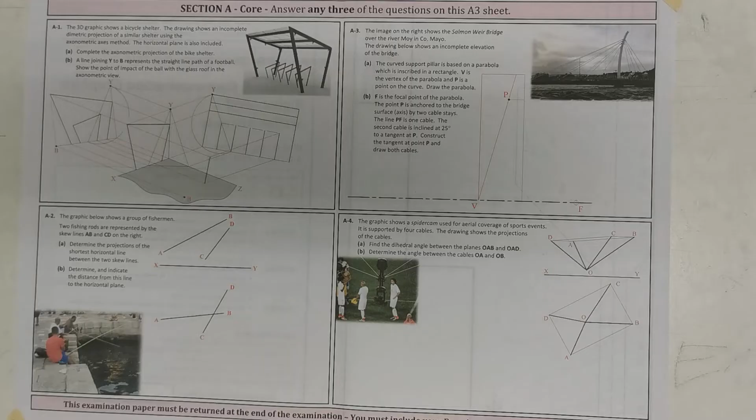A1 is an axonometric question, and just having a quick look at it there, just to be careful about what you're given. You were given...

This bike stand here, so I'm going to just number these 1, 2, 3, 4 and 5. So...

When they project in, I'm going to just project this forward another bit now, because...

The one that's given here is the one on the ground at the back. Now again, I'm going to just throw a few colours in this to help people understand it, but they're after giving the back leg of the fifth one.

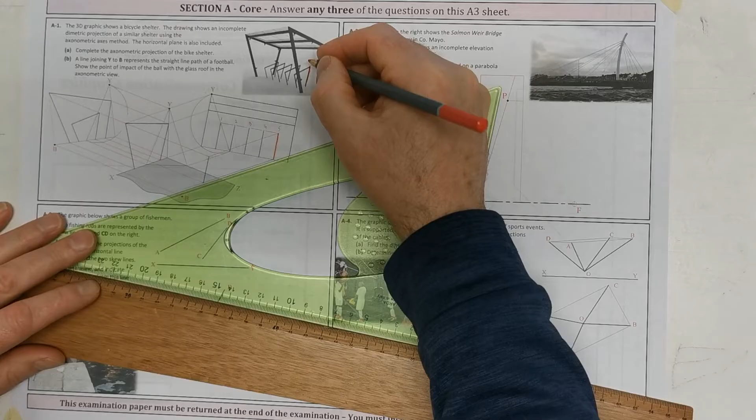So I'm projecting forward here so I can find these points on the ground. So I'm going to draw this. I'm going to draw those supports inside here first, and then I'll do the roof and the frame around it afterwards.

So we now have this point here on the ground for the fifth one. So what I'm going to do there is I'm going to just project forward and find the points on the ground for all of these.

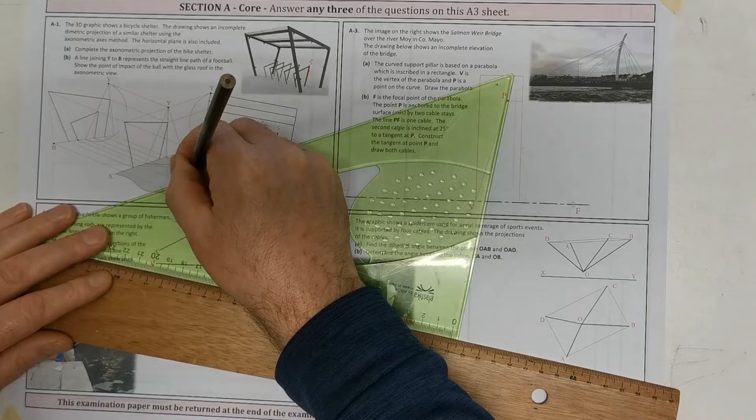So those 2 points are for the fourth, third...

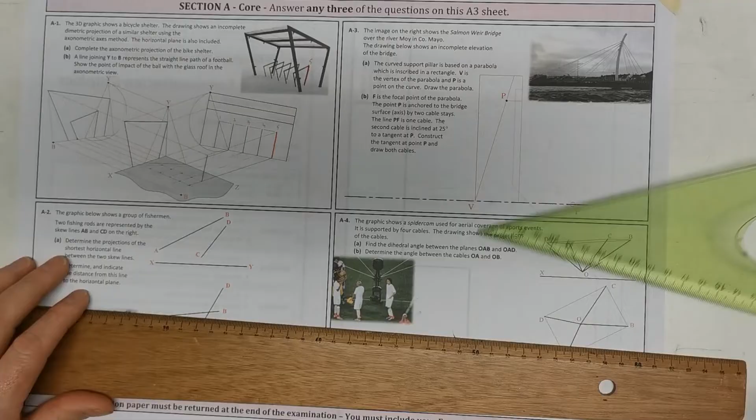Okay, so they're all the points that are on the ground. Now what I'm going to go now and bring next is I'm going to just project there. So this is the high leg at the back.

Okay, so the point up here. So I'm going to find them next. So they've already, well, it's just coinciding here, but we've got the line to work with on that. So I'm going to find these next.

So there is 5 found. So 4 is here. Now...

I'm going to leave out some of these lines here now just to reduce the clutter. Okay, just so you can see where that one came from. So, and I'm going to draw these in.

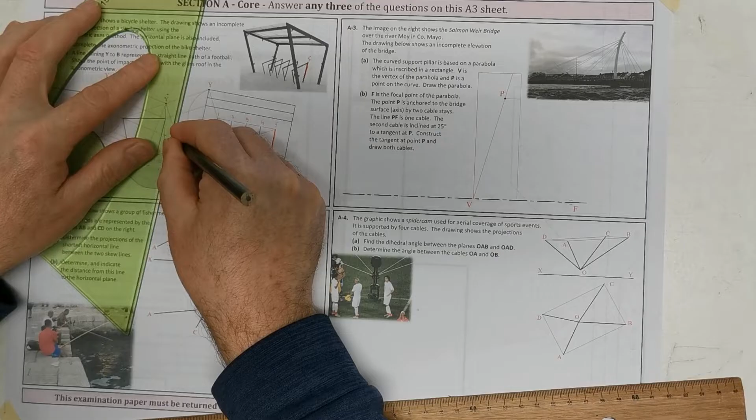Okay, so we have found now the 5 back legs there. So my next issue here now...

I'm going to project down the line that contains all of these front legs. So they're all at this height.

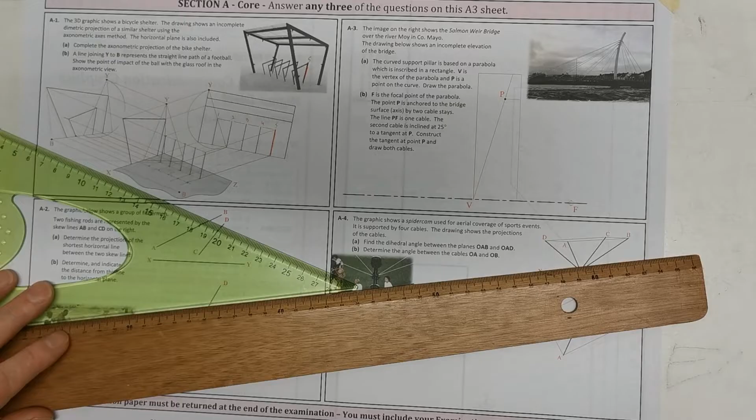Now, the problem here now is these sloping down bars here. The height, we knew the height of that off the ground because we were given that.

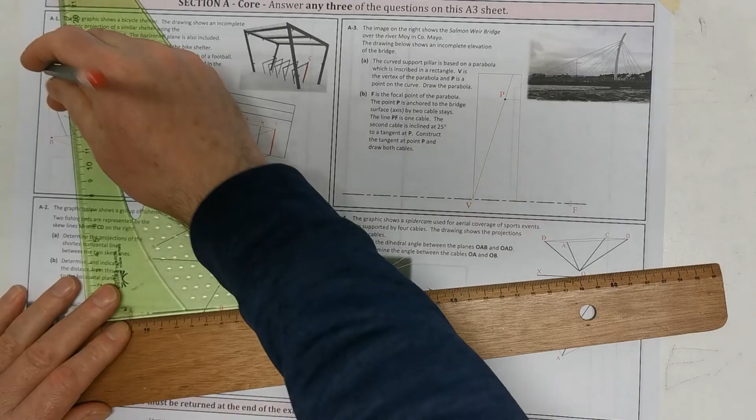But what we need to do there now, I think the easiest way to do this is I'm going to take a height from this side view. I'll just put this in red so you can see it. I'm going to just call that H. We need that height.

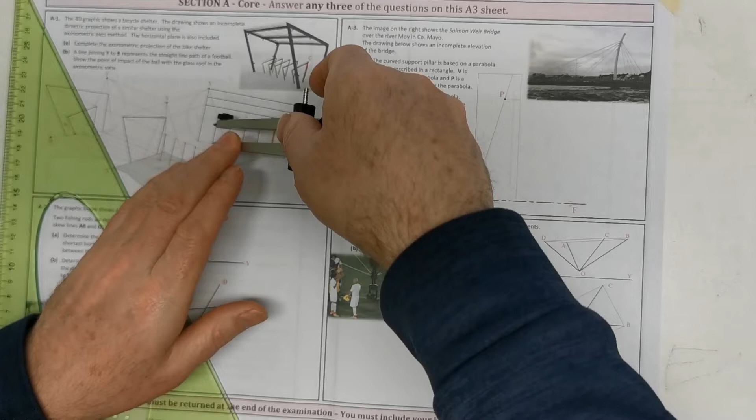So I'm going to take that height. Now since this is a side view, a height in a side view is the same height in a front view, which is over here. I'm going to step that up there...

And take them across parallel to the ground. So I'll just mark these bigger than they need be so you can see where they're coming from.

So that now is the height of the front points in all of these. So now I can project these down.

So that front point must be on this line here. Okay. So that's 1, or that's number 5 really. Number 4.

Number 3. Number 2. Number 1.

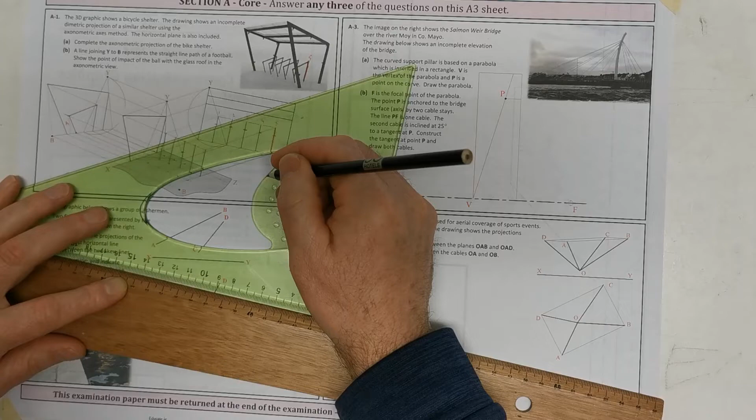Okay, so there we go. 5, 4, 3, 2, and 1.

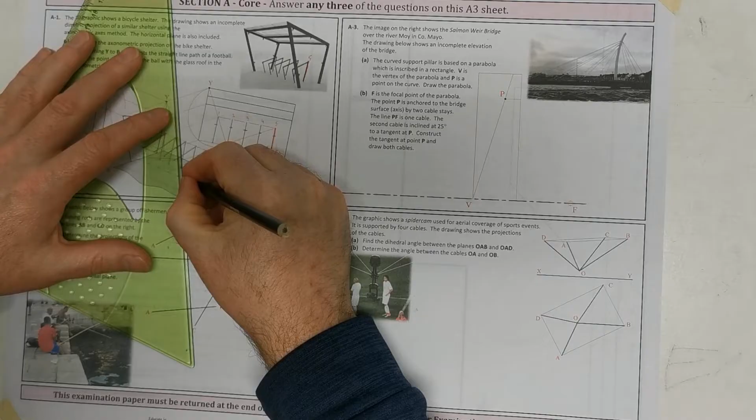And then they return down to the ground, like that.

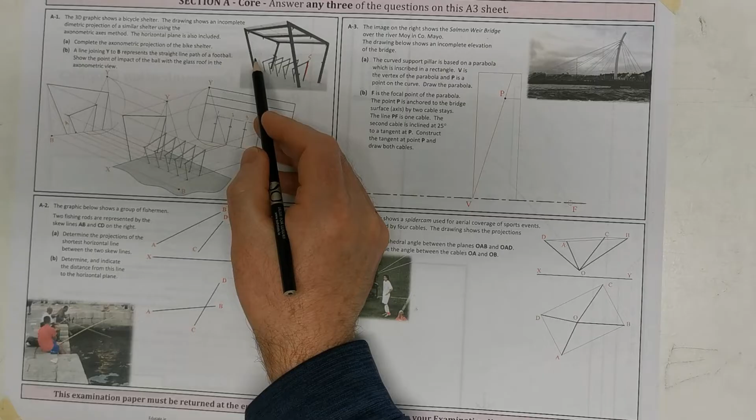Okay, so that is our 5 bike supports. So now we need to do the shed or shelter there. So we know they've given us the side of that there, which was a big help.

So I'm going to find the highest point here out of the front. Now I just need to project, because I'm projecting it down from the side view there, and then I'm going to project it down...

From there. Okay, and that point is here. Now it's coincidental that this projection line here brings down the top height of the front of the shelter, but...

It also coincides with the back of the supports as well. That doesn't make a difference, it's just a coincidence. Okay, so that there is the point that I'm after finding, and...

I'm going to use parallel lines here now as well. So the back lower down point, I'll draw this a little bit heavier than I normally would, just so you can see it.

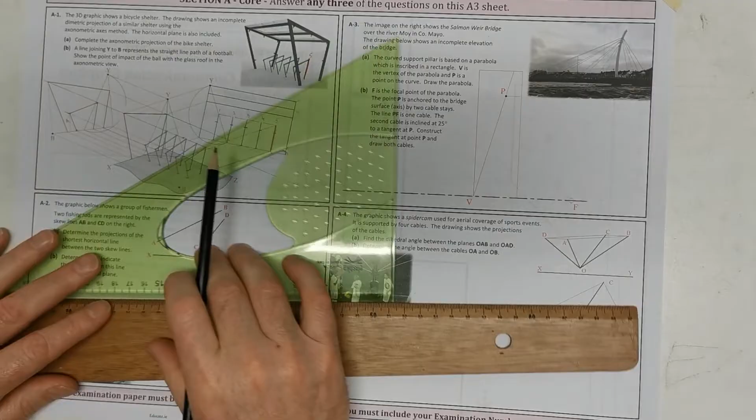So the back low point, I'm going to put L for low, H for high, and that middle line there represents the middle steel support in the shelter. So the low one comes down to here.

Okay, the low one comes down to here and there. We already said the high one is coming down from here and there. So that gives us

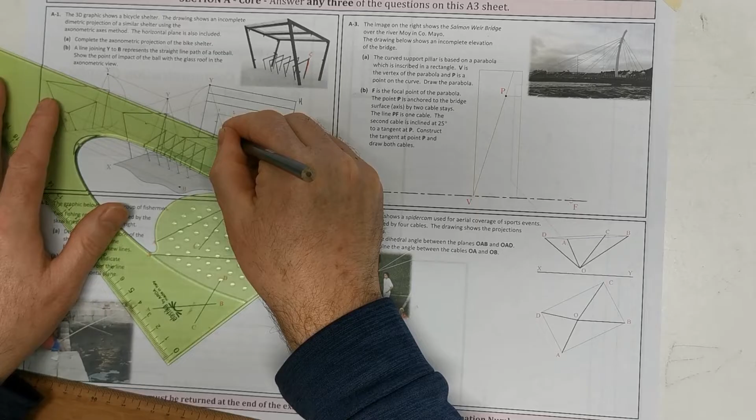this line in the shelter. And I can also heavy in then properly that, this, and now the next thing I want now is, and just be careful with this here now, they did not give us the projections of the leg supports here.

These two points on the ground are coming in here. So those points on the ground, the front one, when I bring it down from here, so here's my front support, here is my back support in the side view, so I mark that.

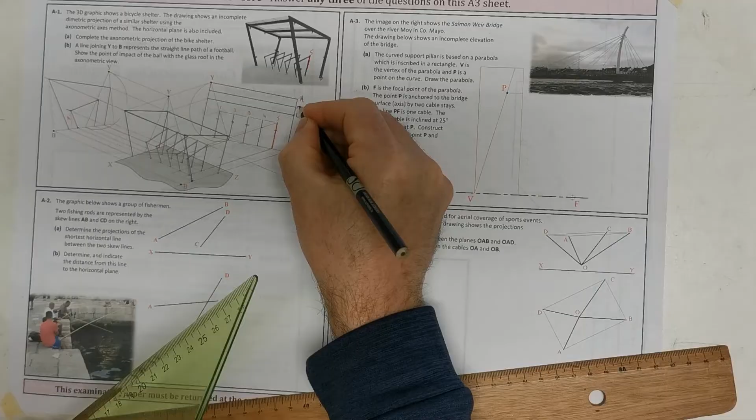So the back one goes up to there, the front one goes up to here, and all I'm missing now is the middle support there, which is where that, I'll just put an M on this line here. I'm missing that middle support now, so I will just project down that line, and that locates it, and we know it's parallel.

And that, I think, is that. So it says a line joining Y to B represents the straight line path of a football. Okay, so a line joining Y to B represents the straight path of a football.

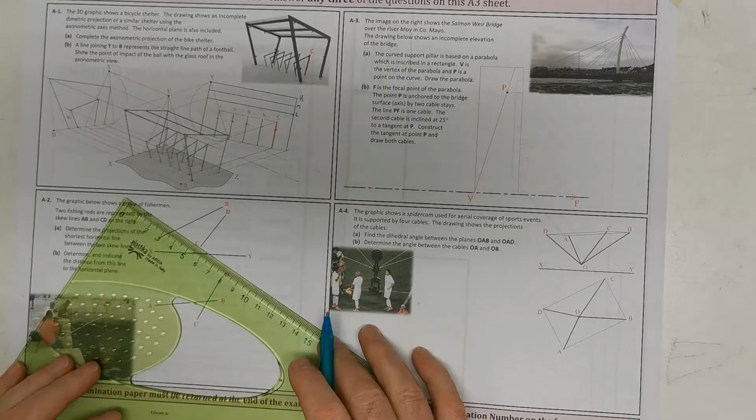So show the point of impact of the ball with the glass roof in the axonometric view. Okay, so basically, where would that ball pass through or impact with the glass roof? Look, what I'm going to do there is I'm going to just do this in green so you can see.

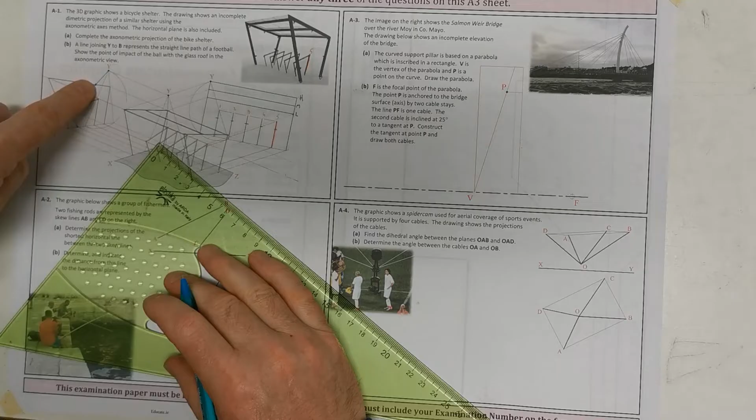So look, if I kicked a ball from B going in the direction of Y, it is going to impact the roof here. That is where it is going to impact it, because I'm going to just do this off the end view. So we can draw in the path of the ball down here. So from Y to B is the path of the ball.

So I'll just put that in green so you can see it. That is the path of the ball, and I'll just put an arrow to show the direction the ball is traveling in. And where does it impact the roof? Well, we know that it impacts it here in the side view.

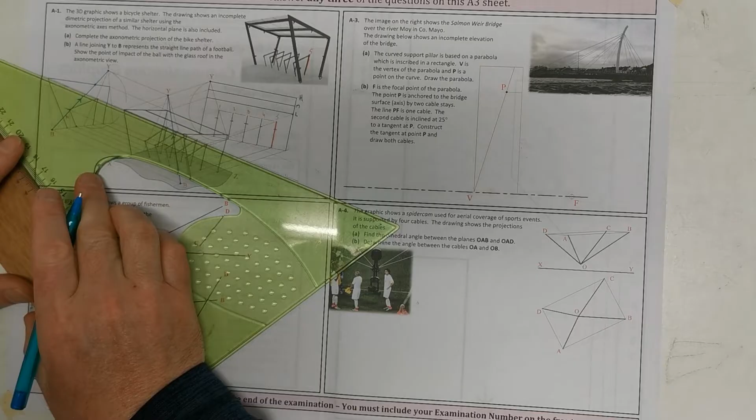So if I project that down to here, that there point P is the point of impact. Just put a little arrow there to show that that's coming down from here. So that's the point of impact in the side view, but we want to show it on the axonometric, and there it is.

Now, second question. So, fishermen skew lines. So two fishing rods, AB and CD. Determine the projections of the shortest horizontal line. Now I am going to highlight here just one thing. Horizontal line, okay? Because the shortest horizontal distance is different to the shortest distance.

The shortest horizontal distance needs to be horizontal in the elevation. So it's not going to be at an angle like that. It is going to be horizontal. So how you go about this is the same whether it's shortest distance or horizontal distance. The first steps are the same.

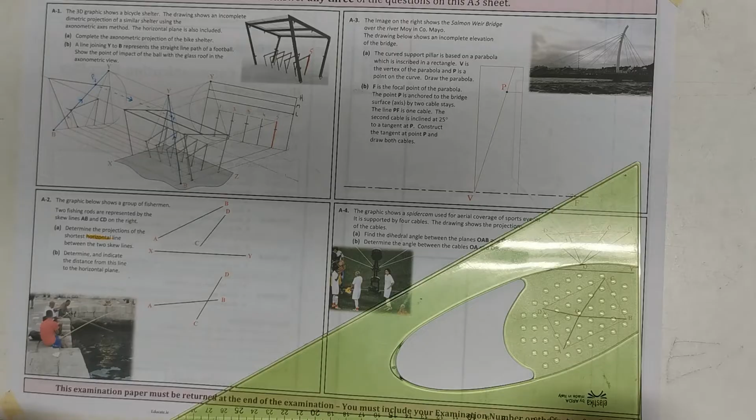We want to create a plane where I'm going to go parallel to AB. It doesn't matter which line you choose to go parallel to, so I'm going to just pick AB. I'm going to go parallel to AB and horizontal from D, giving me here a point that I will call X.

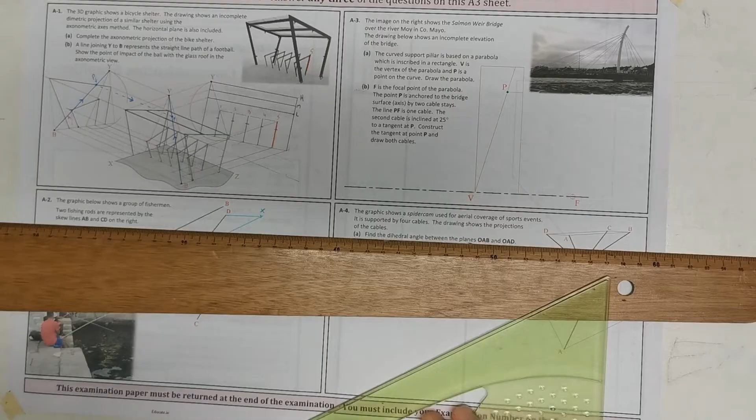Okay, and I'm going to mark now that that and this are parallel. So that's parallel to AB. So I'm going to bring down point X to the plane. And I want to do the same parallel again.

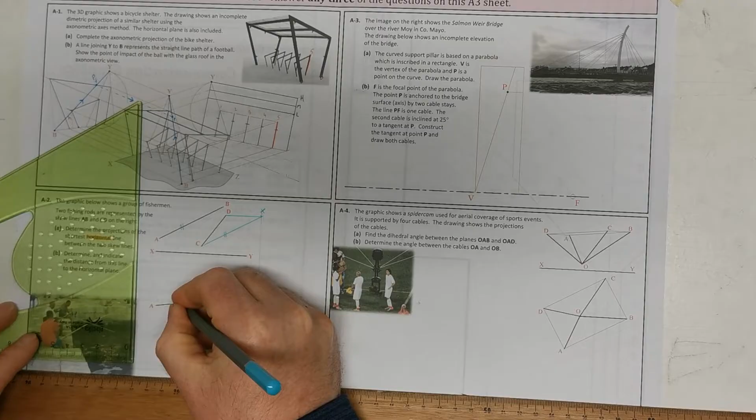So parallel to AB. Parallel to AB. So I want to go parallel to AB from C. And this is X now found in the plane.

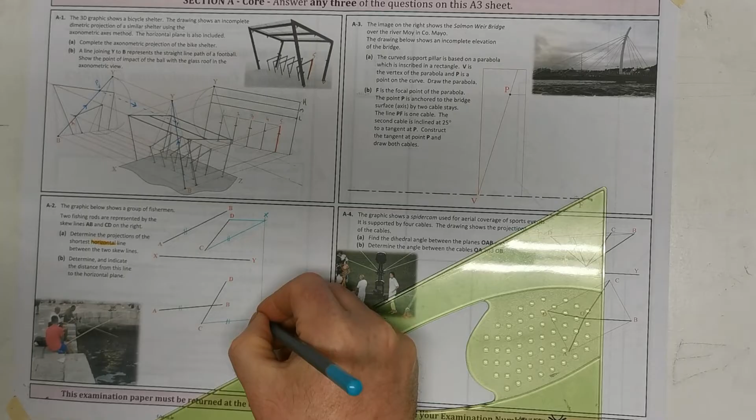Because X has to be down here, and we want to do the same parallel in both. So I will just join there now, X to D. No, X to D is the angle that we want to look at.

DX, horizontal line. Now, if I look at that angle, DX, now I'm going to keep the XY line. I'm going to draw down on top of my construction work here now, because all I wanted to find there was the angle to look at. Okay, so now that I have my angle to look at,

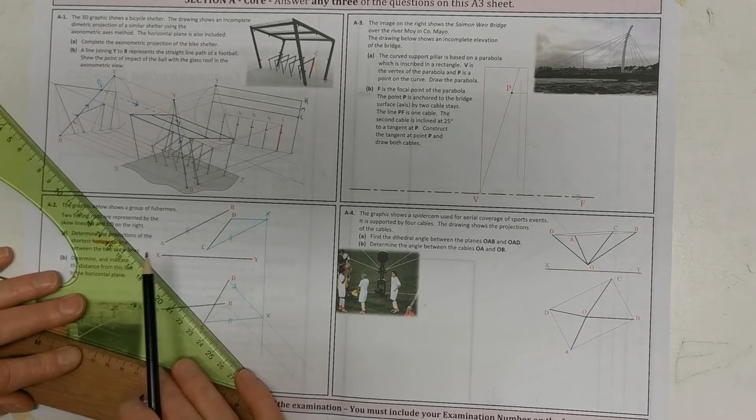and I'm going to project these forward. So D and B, A and C. Okay, and really what I wanted there was that angle. And the XY line I'm going to put at 90 degrees obviously to them, but I'm going to keep it back here because now I've found the angle to look at. So here's my XY line.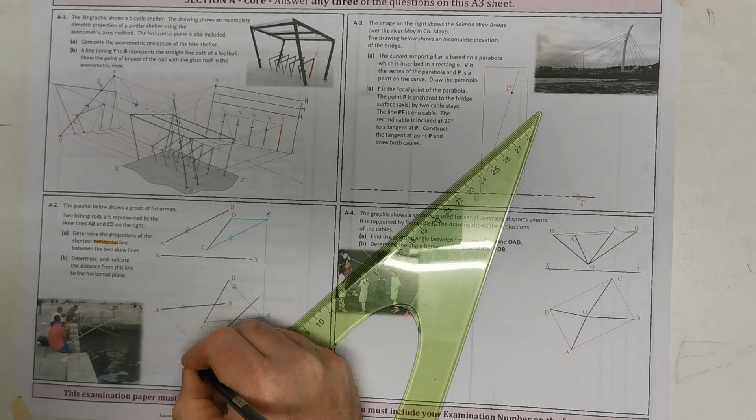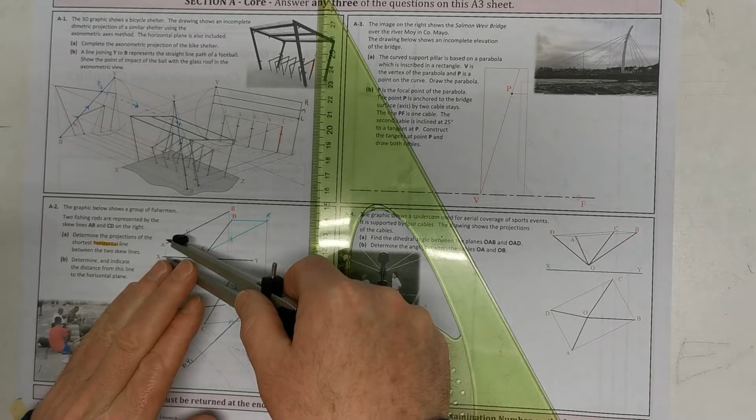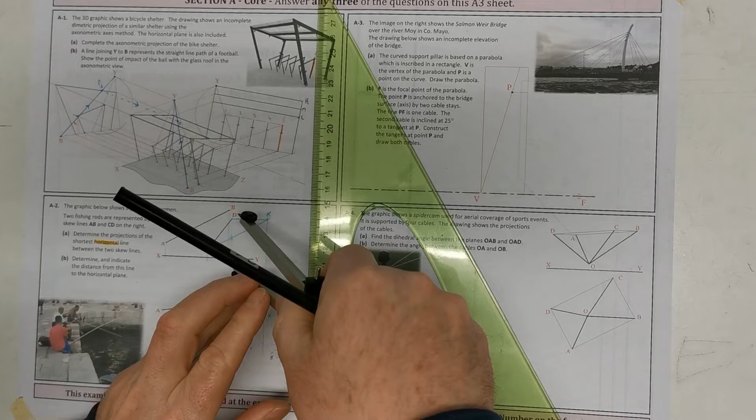Okay, now I want to draw that auxiliary view there, and these lines should appear parallel, so I'm going to project these down to take some heights. The rule with auxiliary views always remains the same. I'm projecting from the plan, so from the last XY line back. So my height for A, and C, B, and finally D. Now this view, the lines should be parallel. If they're not parallel, you've done something wrong, so stop and be careful, don't try to work wrong.

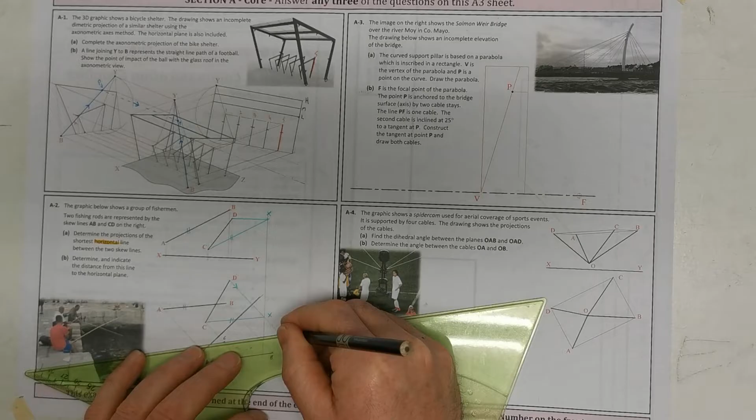So A joins to B, C joins to D, so you can see they are parallel. Now if I wanted the shortest distance, I would take another auxiliary perpendicular to them, but this is the point I was making earlier. We want the shortest horizontal line, so we need to look parallel to the ground. So here is the angle of the ground.

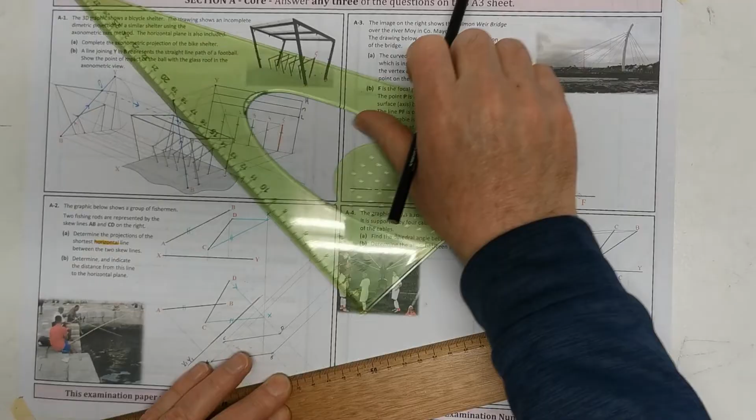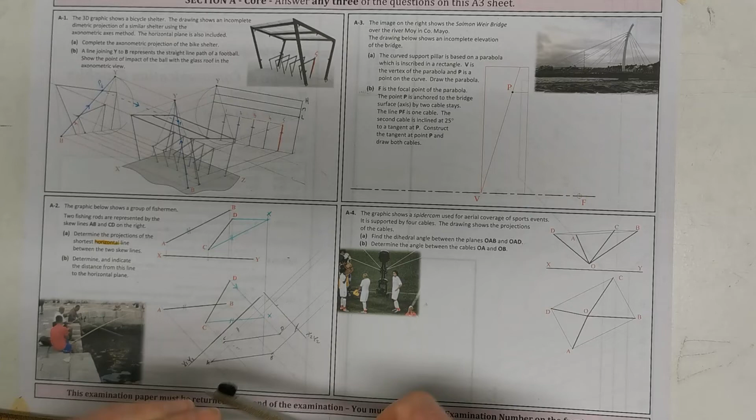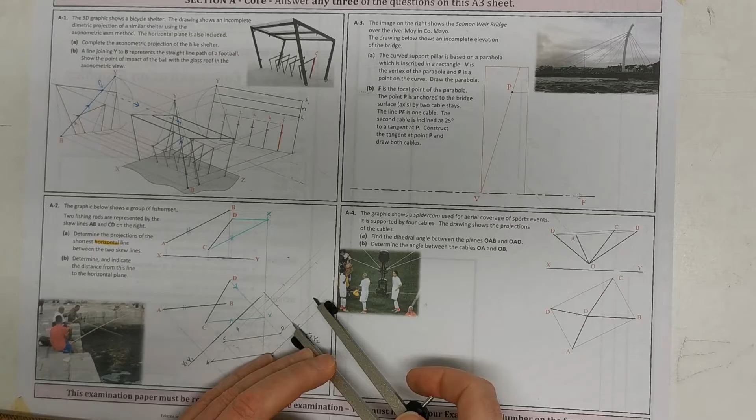So we want to look parallel to the ground to see the shortest horizontal distance. So C, A, D and B, XY line. The XY line goes here, and again remember the rule, I am projecting from here, so from the last XY line back is my distances. C should be the closest one. There's A, which is the furthest away. Just be careful you don't mark a distance on the wrong line. D. Okay, so I'll just index these B, C, A,

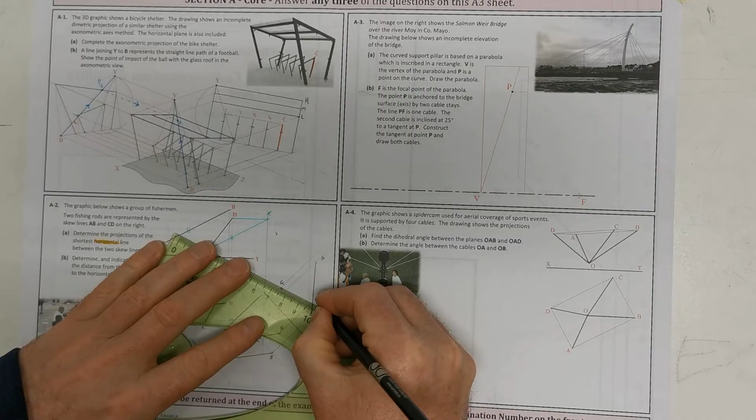and D. So when I join these now, they should be crossing. So we've got AB, CD, okay. Now the point that I'm looking for is this point here, where they appear to cross. I know they appear to cross in the same way as these pencils appear to cross there, but they don't in reality.

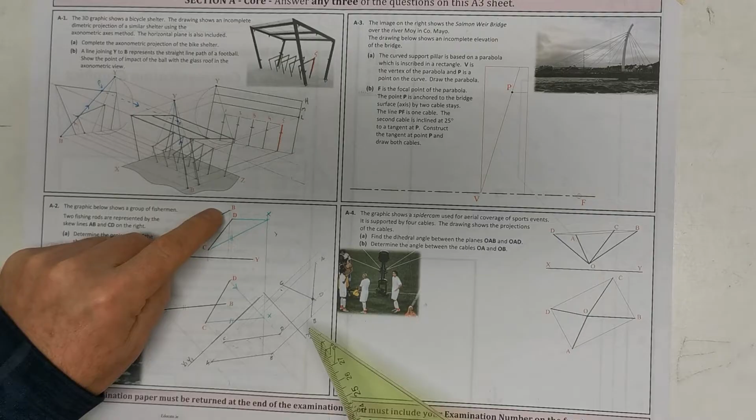So this is the shortest distance, but we need to bring that information back to the plan and elevation. I'll just leave it in green here. Switch to set squares for this. So there's our angle to project back, and that is our shortest horizontal distance here.

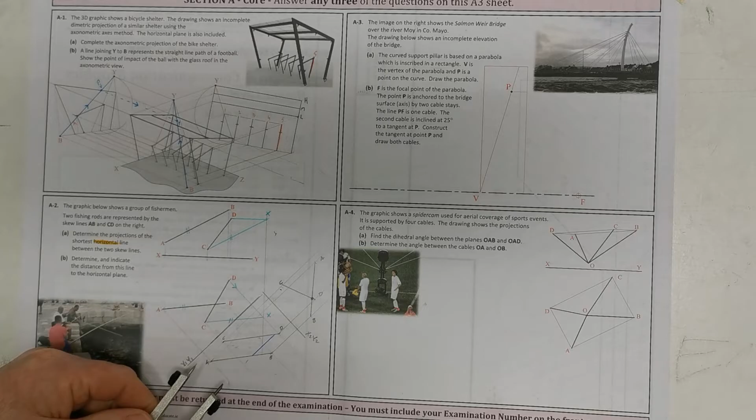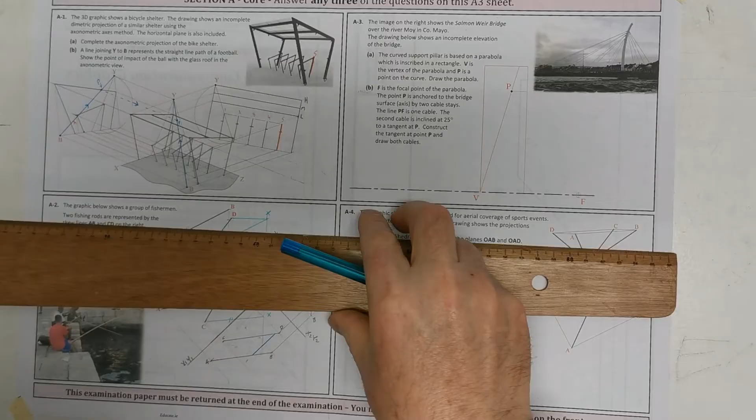Now you could find that point on AB and find that point on CD and project back and project up. I would have a slight preference, because when we were setting up this view, we took - I'll just demonstrate with A - we took our distances from A from here, so they're all heights that came from elevation. So what I can do now is I can take this height off the ground here and step that height up here,

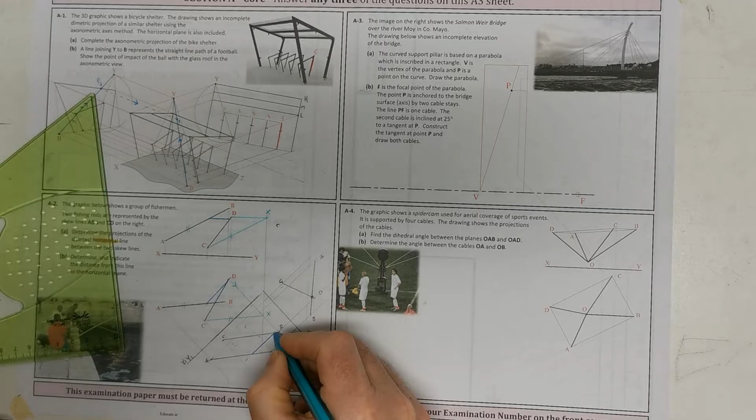and that is a more accurate way of bringing my shortest horizontal distance back. And to bring it to plan, then it's here on AB. I won't draw this line down now. It's here on AB, it's here on CD. So the plan of the shortest horizontal distance is here. Now that would have given me the same answer if I brought this point back onto AB and up and back onto CD and up. But if you're any way out, and it's easy being a mil out, it can sometimes give you a sloping line up here when it's supposed to be horizontal.

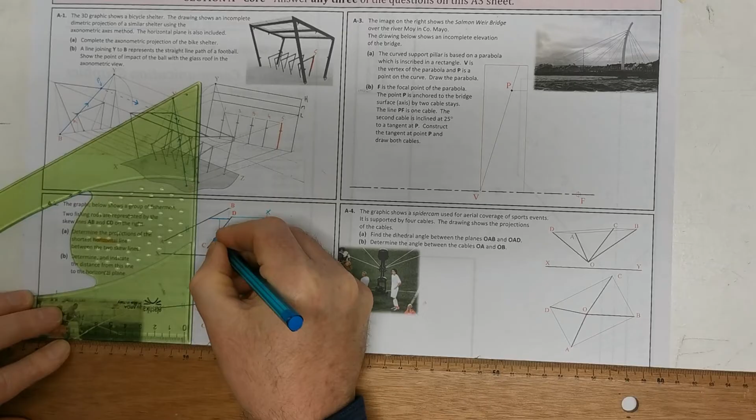Okay, now the second thing there says, determine the projection of the shortest horizontal distance is done, and determine and indicate the distance from this line to the horizontal plane. So determine the distance from the horizontal plane is just to indicate it from the horizontal plane, it's kind of a test of terminology really. So it's like there to there is the height. Okay.

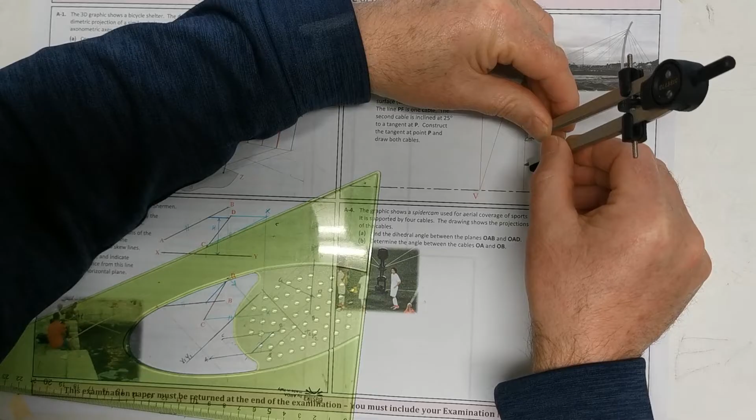A3. Now again, this is a curved support pillar based on a parabola. So we've got the vertex and a point on the curve. Our curve is coming this way, and there's the focus of the parabola. Now whenever you're given a point, let's see if I take this distance here. If it's a parabola and the construction is set up for you, you could work with your own distances, but generally you can presume that it's a quarter, a third, or a fifth. You can see there - that was exactly a fifth, and it's the same in this direction here.

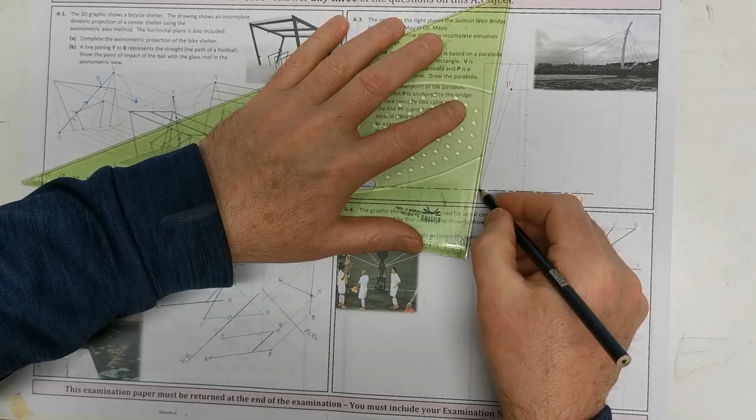Just need to be accurate there, because if you're 1 mil out and you step it 5 times, you can be 5 mil out. So here's my distance here for this one. So this will work out being 5 as well, because this is back to our junior cert parabola construction. Now I'll put that on another video anyway at some stage, but so we're just constructing a parabola in a rectangle. So those go to the vertex, and they'd already found the first one, so it's second to the second.

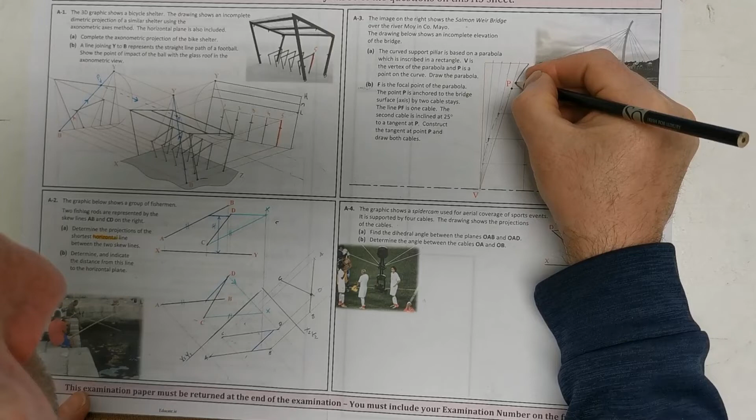So those are all our points starting here, and there's our parabola. So the curved support pillar is based on a parabola in a rectangle. Draw the parabola. Okay, so this now being a parabola, we know that...

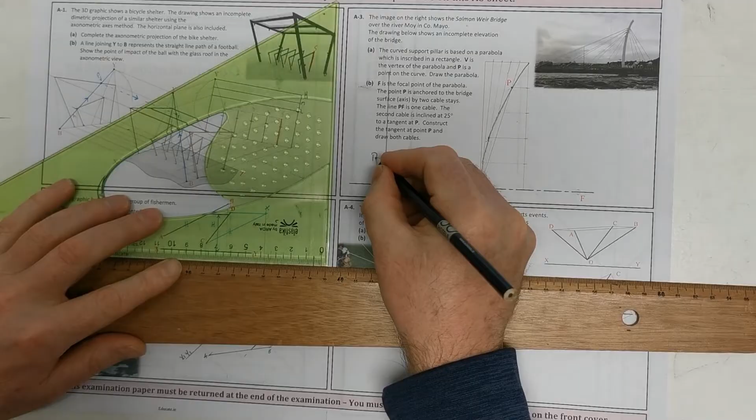Point to the focus would be also - I'll tie this in even though it didn't ask for it - that distance from the point to the focus would be the same to the directrix. So if I want to, I could just find the directrix here for this. It would be here, that distance, that would be the directrix there, DD. So we've got our axis.

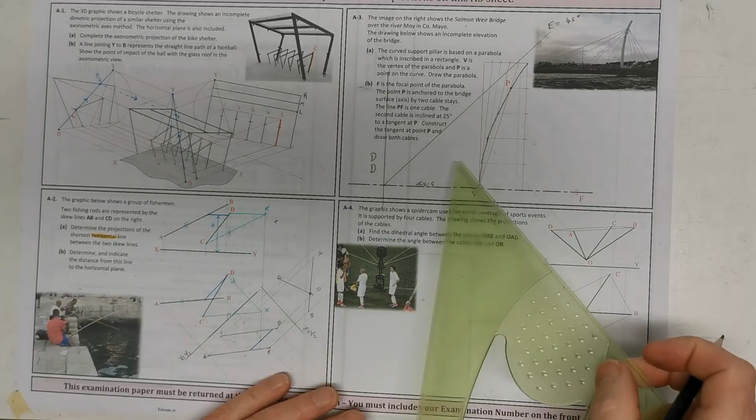Just to link it more to the other method, the eccentricity and axis method, and since that is the directrix and it's a parabola, the line of eccentricity is equal to 45 degrees here, just to link it in with the bigger picture. And if I came straight up from the focus there, it would be tangential to it and all that. Just linking it to the bigger picture there.

But what they asked for here anyway is that F is the focal point of the parabola. Point P is anchored to the bridge, and the line PF is one cable. I'm going to put this in blue here now. So the line PF is one cable.

And the second cable is inclined at 25 degrees to a tangent at P. So construct the tangent at point P and draw both cables.

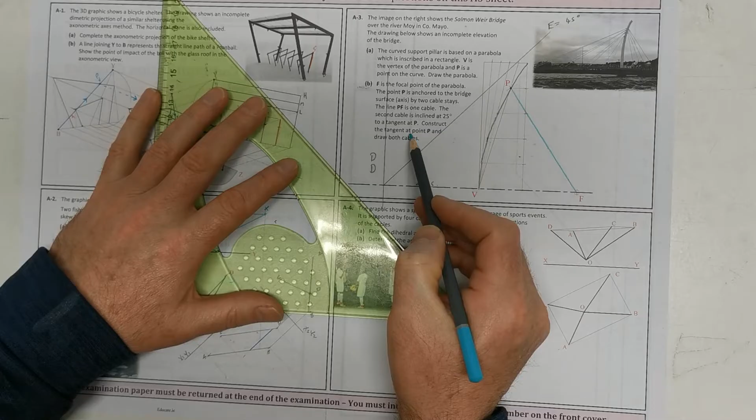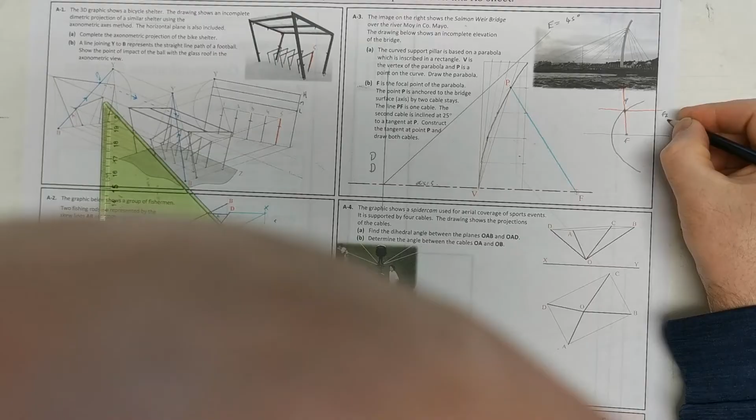Okay, so the rule with drawing a tangent to a parabola - let's say you've got a parabola here. I'll just sketch it over here for a second. There's the parabola, and here's your focus. And if we want a tangent at P, you join to PF, I'll extend that, and join to the second focus or focal point, which is at infinity, F2 - I'll just put the infinity symbol here - which is parallel to the axis.

And we want to bisect this angle here now, and that's going to give us the tangent. I need to apply that construction over here. So the second focal point would be at infinity, that's the rationale or the thinking behind it.

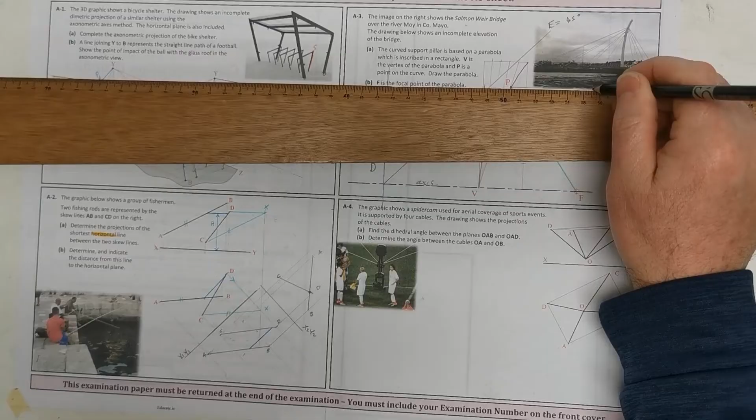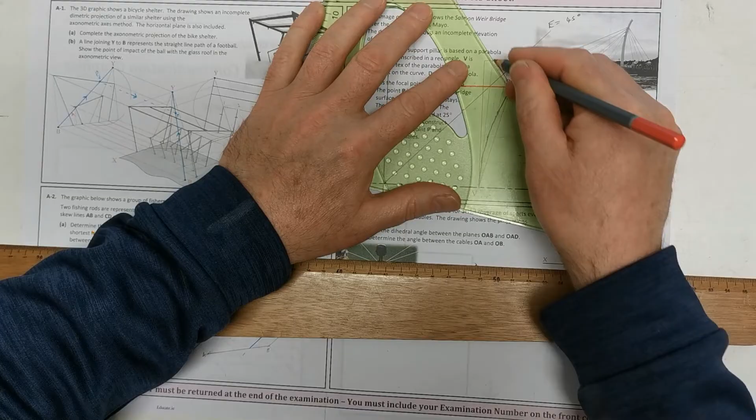I'll do this in a color there now just to make it a bit easier to see. Okay, so I'll do it in red. So there's that one, and there's our cables there. So I'll just extend this out as well here in red. So I want to bisect this angle here, or that angle there.

Do that with a compass. So again, step out a distance. Don't do this too small now, do it a bit bigger, do it big so that it's more accurate. Just make the compass a bit bigger, so two equal distances again. Swing an arc, another arc. Okay, now this is the bisector of the angle.

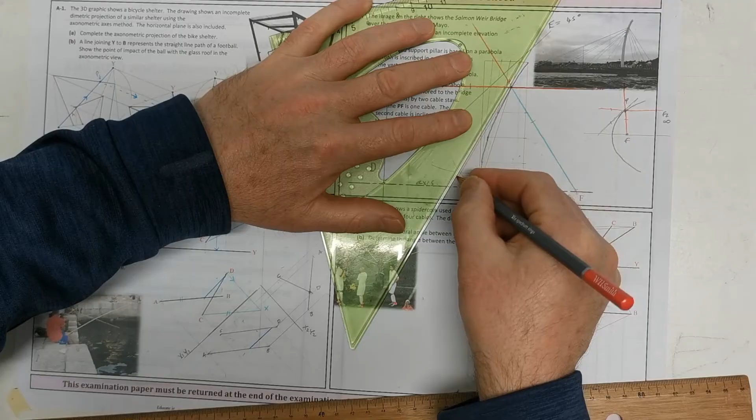So there's my tangent. I'll just put a T on that. So I have found the tangent here now, T for tangent. That is the tangent. And the cable stay is 25 degrees more than that.

So you need a protractor there then for this. So there's our protractor. Now 25 degrees angle with the tangent. So I'll just line that up with the tangent. So 25 degrees more is there. So that's the angle.

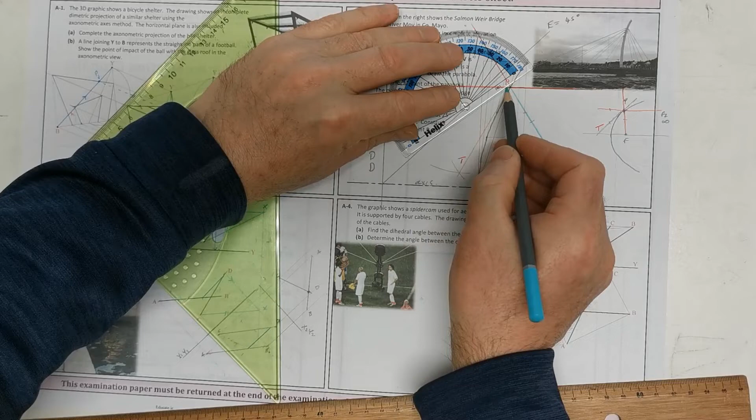For the second cable, I'll just extend that off over here to tie it down. Now I know that finding the directrix and putting the eccentricity and all that stuff in on this, but really it's better off to try and understand the big picture on conics rather than just answering the questions in isolation. You need to see the big picture. So construct the tangent to point P and draw both cables.

So that's that sorted. Finally, the graphic shows a spidercam used for aerial coverage of sports events. It is supported by 4 cables. The drawing shows the projections of the cables. Find the dihedral angle between OAB and OAD.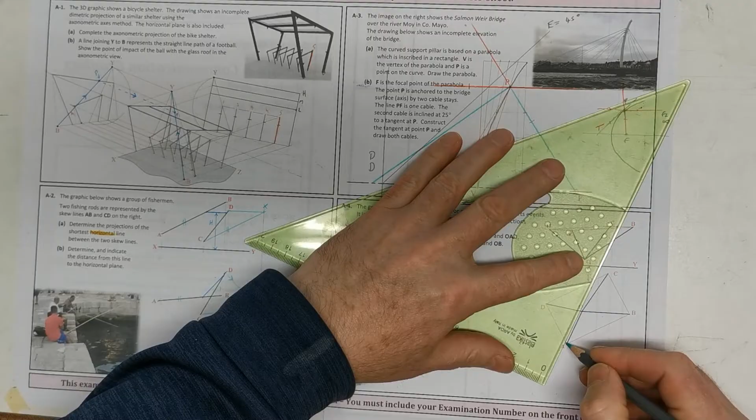So OAB and OAD. So again, OA - I'm going to put a color on this. OA is the line of intersection. It's on both triangles. So I'll just color that in good and bright there now so people can see it.

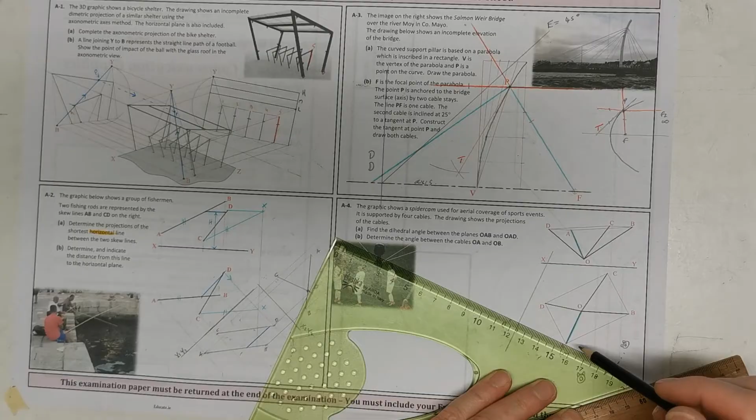So I'm going to put an XY line just over here. And I want to project these up 90 degrees, so we're going to need definitely A. We're going to need O, which is down near the ground. D. B. And C.

So again, our rule on auxiliaries applies here now. So we are projecting from the plan, from the last XY line back. That is the rule. Now ideally I would find exactly beneath this, but okay, so that's my height for O.

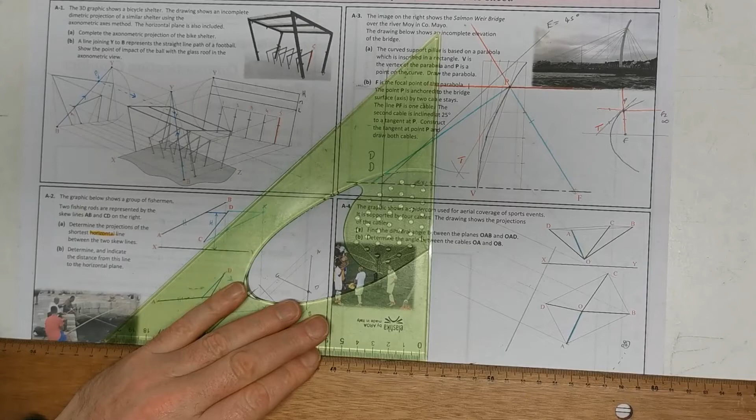Now I'm going to just mark these here, just project these down so that I can take absolutely vertical heights to be accurate.

So A, again just be careful now you don't mix these up. So A, I'll go a bit slower because I'm trying to teach using these questions as opposed to just answer the questions. So AO, that is the true length. Just put in there TL. Now that is what we were looking for, but I also want some more points as well because we can't find a, so D is this height.

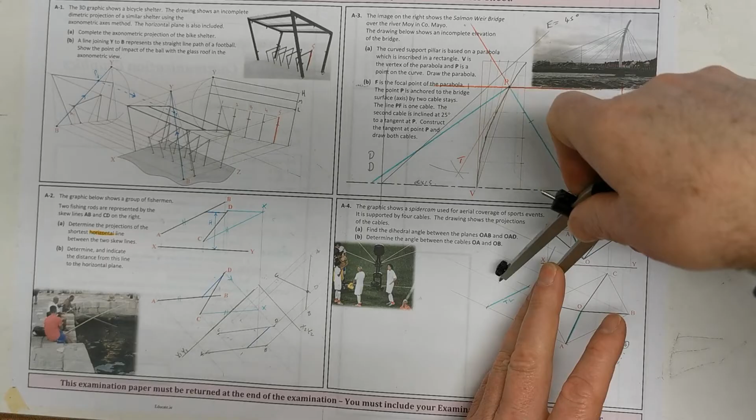We can't find a dihedral angle without a point on each of the other triangles or planes. So C is here.

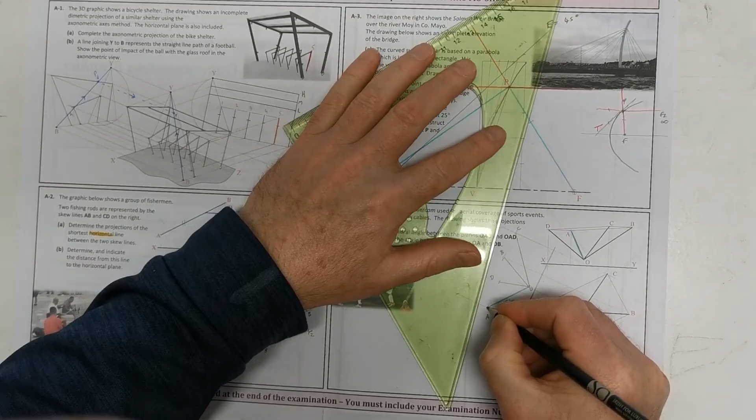Okay, so I'll just index them again. There's C, B, O, D, and A. Now, do I have to join them up? Well, I will. Okay, so it's A goes to D, D to C, C to B, and back to A.

Okay, so that now is the true length of the line of intersection, so between both of them. So I want to look along that now and get a point view of it. So I want to look along that. I'm going to put an XY line here pretty close.

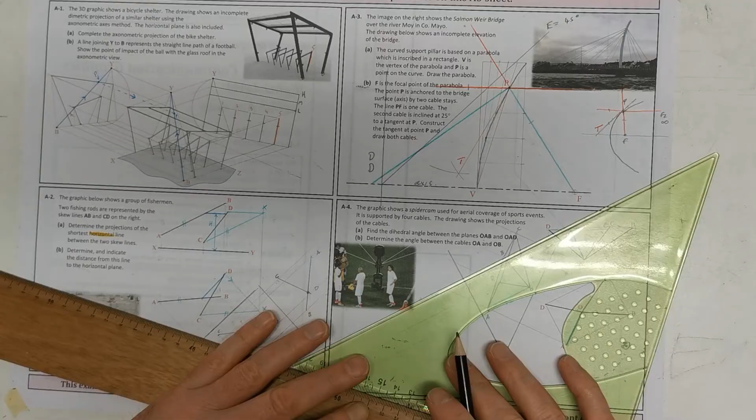So bring our points, project them out again, that angle. Okay, now the reason we're going to be getting a point view of this is because by putting the XY line parallel to AO there, when I take my distances here, now we're projecting from here, last XY line back. So when I take that distance here for A and for O, it's the same distance. So when we look along that true length, they're both the same distance and they're both on that line.

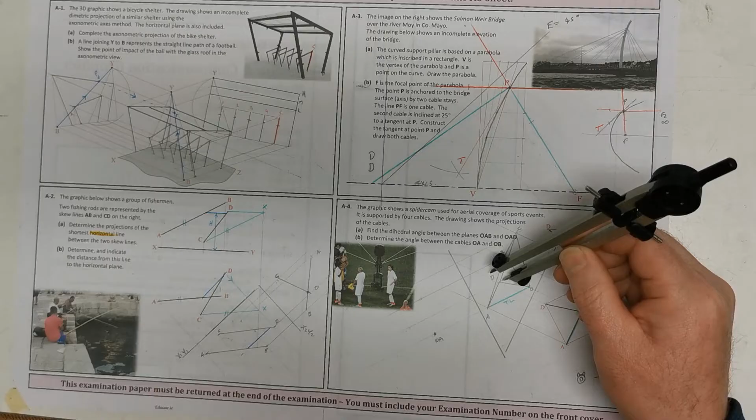So that now is a point view of O and A. So now we need some more points. So I'll bring D. Now really I only need D and B for what I'm doing here. Okay, so D is there. B is here.

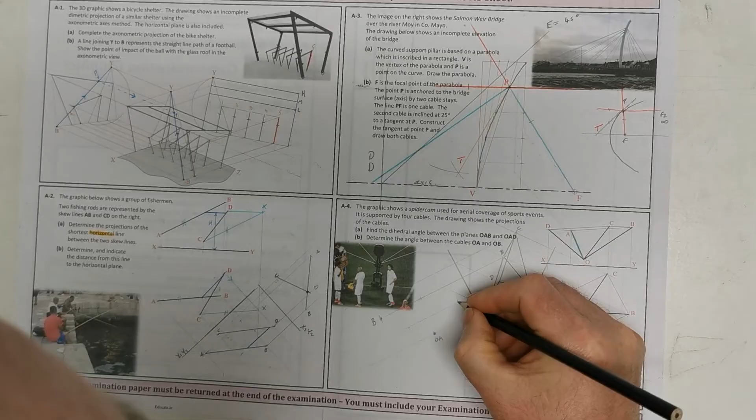So this is my dihedral angle. Okay, so that's the dihedral angle between OAB and OAD, and that's edge views then of both planes.

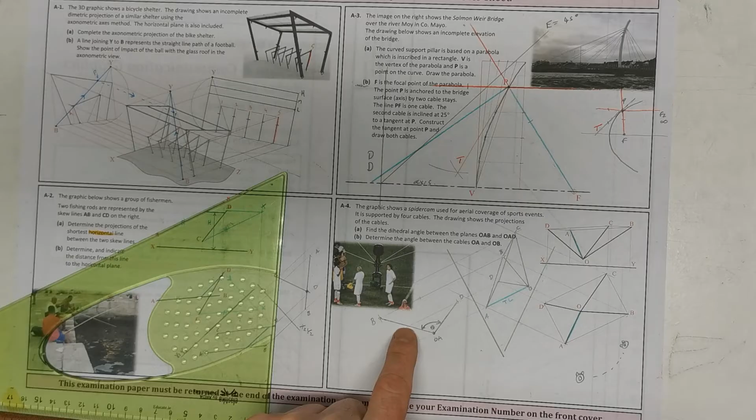And then determine the angle between the cables OA and OB. Okay, so they want the angle between the cables OA and OB. Now really what they're asking for there is the true shape of this triangle. Okay, so they want the true shape of OAB.

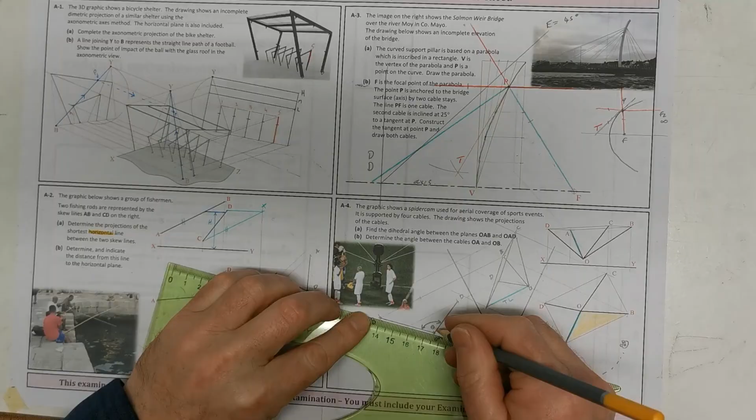Just color that in there to again help us understand it. So the angle between OA and OB, true shape of that. Now a really quick way of finding that, the true shape of OAB, because if I color that plane in there, this is it here. We have it here as an edge view.

That's an edge view. So if I was to look down here at this angle, perpendicular, so I'll just draw a person looking down there. So if I was to look down there perpendicular, I will see a true shape of that. And if you already have an edge view of it, that is the quickest way to finish this off. So just set up there my set squares to go.

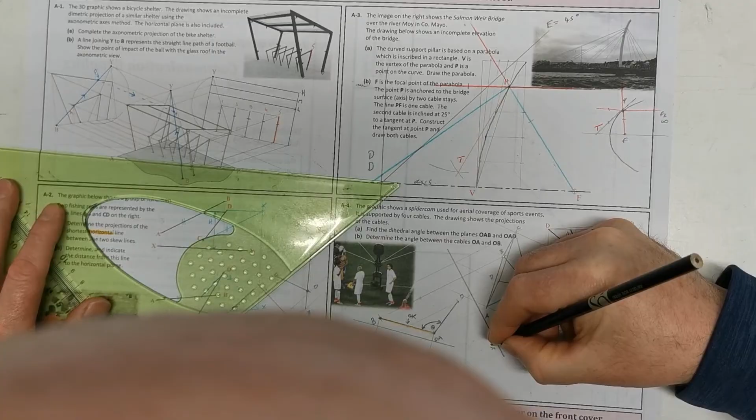Okay, so that's our angle. So I want to look down here. Going to put an XY line there really close. Okay, so that was my XY line, that was XY1, XY2, and I'm putting in XY3 here. So I'm looking down here, so I'm projecting from here, so the last XY line back.

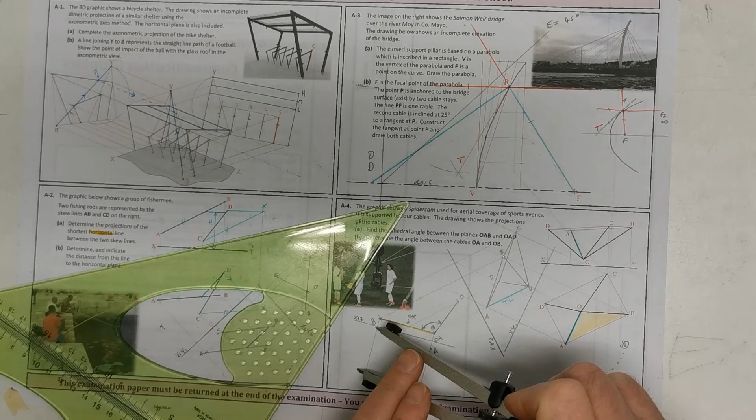Projecting from your last XY line back, so my distance for A, my distance for O. Make sure you have a good sharp point in your compass for these. So A and O, and finally my distance for B.

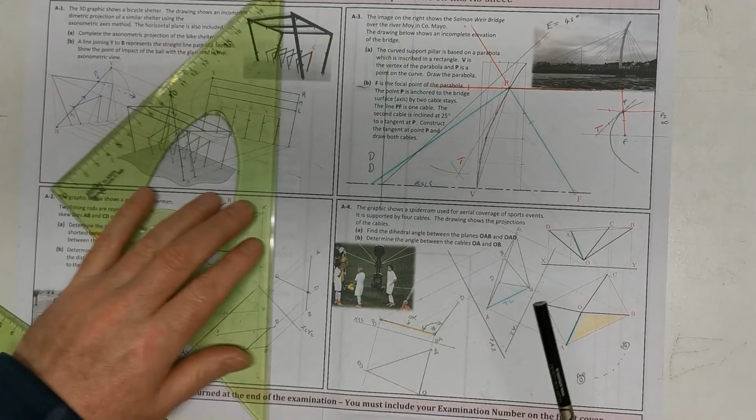So that there, AOB. And again, just to link it back to our plan here, just colour a tiny bit in. Okay, and the angle they wanted was the angle between OA and OB, so it's the angle at O that they were looking for. So I just marked it in there with a little theta.

Now there are other ways you could do it. I mean, I could have taken a horizontal line from A across here to OB, find that point at OB, and I could have taken an auxiliary and got an edge view of the plane down here and looked at 90 degrees to that. There's other ways of doing it, but if you've got an edge view in the dihedral angle, it's just quicker to take one more view and you have it. So yeah, that's 2018 sorted. So I hope that's of use to you.